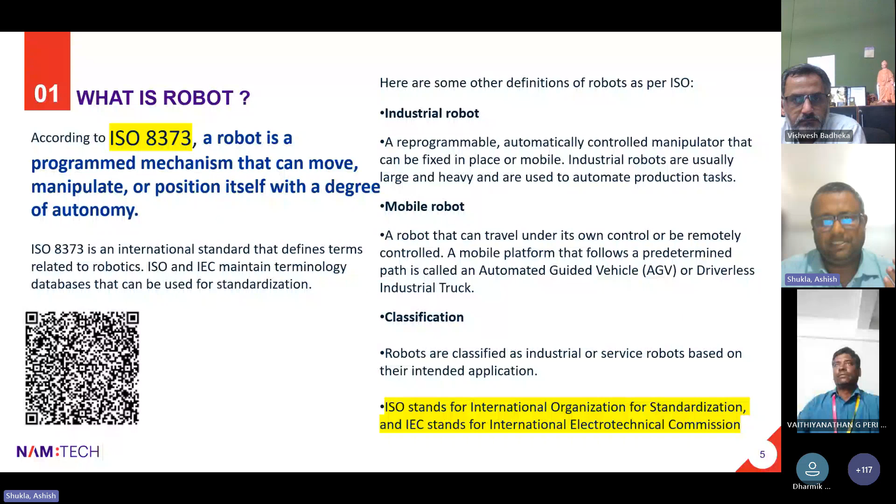Now Industry 4.0—if I'm writing to you, dear recipients, in a mail, because in Industry 4.0 communication is also a parameter. So if I'm writing 'dear recipients', or 'dear sir', or 'dear sir, madam'—how many of you are okay with this kind of writing, or how many of you would like to hear such writing?

Probably the numbers may be less, or this may not be very attractive for each one of you. So what is that? This era is called mass creation for email or production basically. You can take this as anything—if anything starts for production, it starts with communication initiation. Then, how many of you like this?

Probably very less. What you like is basically mass personalization. Let's say if someone writes to me 'dear Ashish', I would be more attracted to that mail rather than 'dear recipient', 'dear sir', or 'dear sir and madam'. So basically, how to deal with such a situation?

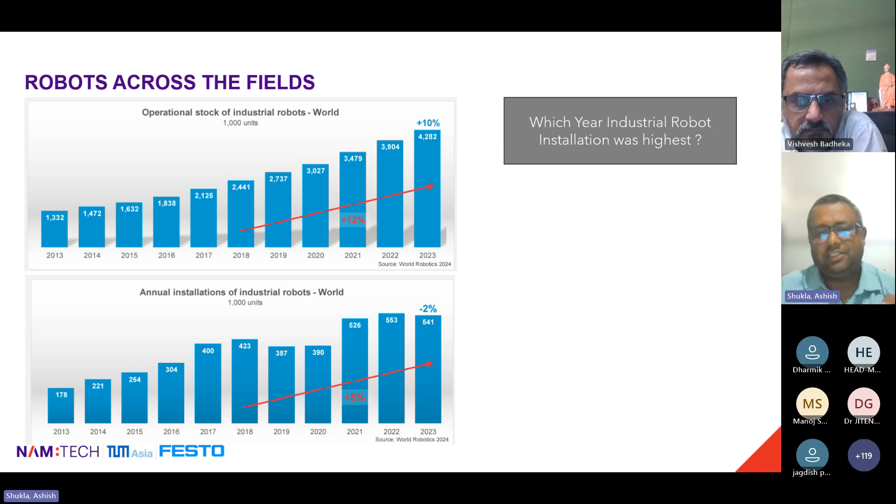In 2022, it was the highest year, and 2023 was the second highest year in terms of the number of robots installed across the globe—or I can say industrial robot installation was second highest in 2023, after the peak in 2022.

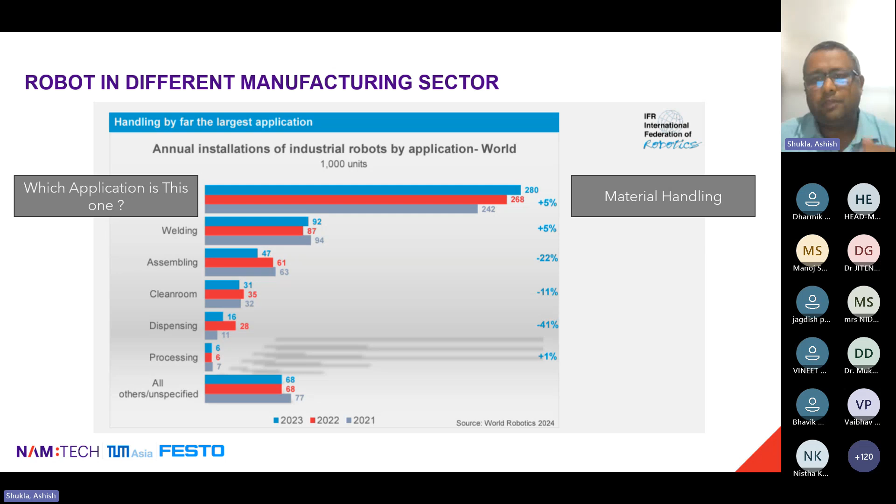So can anyone please try to guess which application is this one, which I have hidden? Anyone? Painting? Painting, of course, good one. I mean, that comes under processing basically, but this is the material handling process. So almost 60 to 80% of the market, varying from the globe. Geographically, the differentiation of material handling keeps changing, but it goes up to 80% and minimum up to 60%.

So what you all learned so far basically, let's have a discussion about what these 8 or 9 slides helped you understand, basically the scope of application. So simple application is basically material handling. So that first thing you learn is the scope of application, where you can identify the robots' application, deployment, functioning, or engaging for the Industry 4.0 application.

Now the second thing you learned is about the scope of market. India at the seventh number. So every day the installation of robots across the globe keeps on changing, or it's increasing simultaneously. So the scope of robotic installation in India is also getting increased.

Now coming to the very important point, how you are going to do this and what you are going to do with this. Basically, the scope of market is going to help you improve the robotic application. It is going to improve the robotic operation. It is going to improve the maintenance. It is going to improve the entire ecosystem of manufacturing basically.

What's your action now? Can someone please try to explain what would be your action after looking at these two learnings so far? Anyone? What would be your action?

Would anyone like to share, please? Okay, so in terms of action: learn how to design a robot. It should be your first and foremost action. Second should be learn how to utilize a robot, and third is learn how to visualize a robot. These three things are very different in nature, but simultaneously required for each individual robotic application. So can someone suggest how to design a robot?

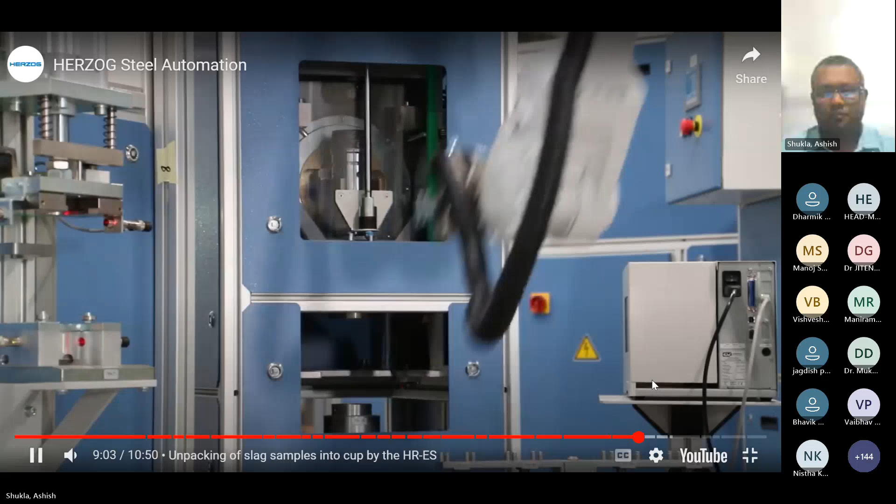Am I audible? So would somebody want to speak about this, whatever they have seen? Hope I'm audible. Yes sir. So does anyone wish to speak about this, whatever we have gone through in the video? Would anyone like to?

Okay, let me speak about that video and then we'll come to what was the problem for me initially. When this particular system was there, this entire system was divided into many parts. First of all, this is basically an automatic operation. So my question to everyone is whether every automation is robotic, or robotic is a part of automation. I understood that robotic is a part of automation, so every automation may not come under the category of robotic.

The one robot you are seeing near my scroller is there to receive materials. Can you believe how much distance the material is transported to get into this cell? It is almost 1 kilometer, or maybe sometimes 2 kilometers. It is a vacuum transport.

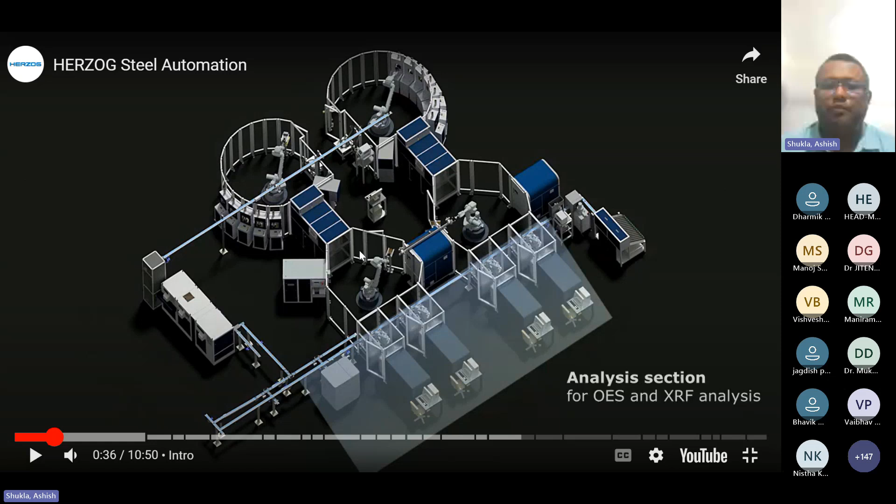Once the material is received, it gets into the material transfer unit. This robot is helpful for identifying the correct recipe, because to get the details or composition of the steel, you need to do certain processes. Once those processes are done, its chemical composition is identified, and finally it is transported to this particular zone where you can see the micro sample area.

There the samples are basically stored. Still, I think there may be a possibility that this is not understood by everyone here.

The entire problem is defined into three parts. One is how to find the composition - of course you need to take a sample out of the furnace. Secondly, you have to take the temperature out of the furnace. Then you have to ship that material to the system where it can be identified.

The second one is they are doing the sampling. In that sampling, how things are done - again the human being is exposed over there. They have temperature jackets with them, but the problem is these temperature jackets are not going to help protect them. So what we have done is identify a robot for sampling and temperature measurement. You can see the third video showing how it is done.

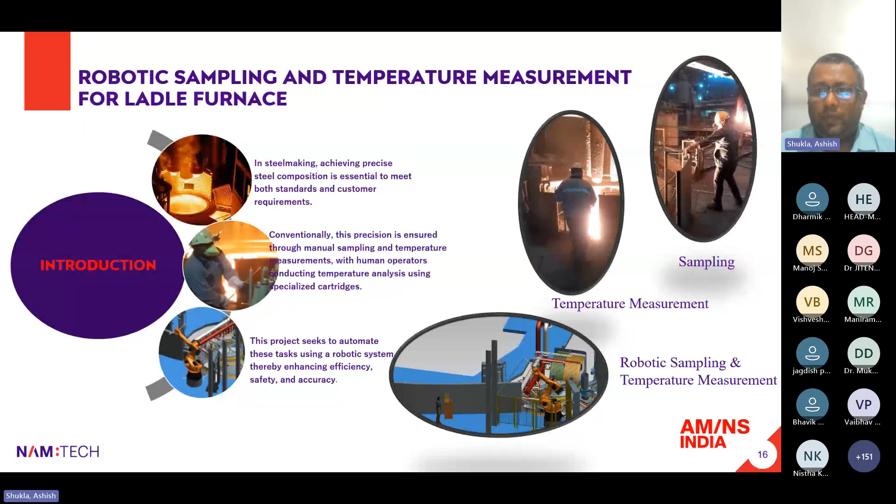Once this is done, our objective is to eliminate human intervention, reduce the cycle time, increase worker safety, consistency, and accuracy as well. You can look into this system.

Now the part is how you can do the robotic design. This was the challenge for us - near the furnace, how we are going to implement our robotic solution, what phases we went through, and what were the critical challenges we faced while doing this entire activity. I'll quickly go through the details of this example.

This was developed using visualization software, and I'll go through a detailed version of this.

So this is the cycle which we opted for the entire problem solution.

Is it visible, or is it still loading? No sir, still loading sir. Okay, just allow it. Yeah, I think it is visible.

Yes sir. So the development journey for the robotic sampling and temperature measurement was basically the CAD modeling of the entire structure. I'll show you how tough the structure was.

Lance and cartridge - for a good designer or a beginner, the toughness or level may vary. After the lance and cartridge design, you go for robot payload analysis, selection of robot placement, then robot kinematic analysis, then proof of concept deployment, showing how the entire situation was handled.

So this was the entire layout. It was, I can say, almost 5 acres of area where we did this entire work.

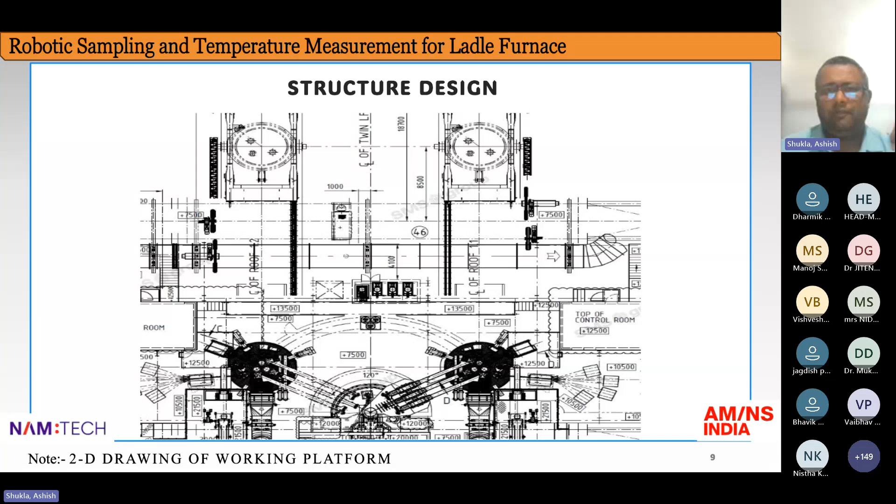So the first phase for us was how to make a 3D model of the entire scenario. This 3D model was built, and after building it, we had to place the furnace. After placing the furnace, the second task was to identify the area or scope where this entire deployment can be done - as I said, design the robot, deploy the robot, or visualize the robot.

Here the robot was standard, applications or solutions were designed, and the deployment - here we are doing the visualization part. These were the two areas where we found the robots can be deployed. We identified the area to utilize it as closely and as much as possible.

So the lance and cartridge design came into the picture. You can see over here that the lance and cartridge - the symmetricity of the lance - you can observe it's a highly unsymmetric job, and you have to incorporate that into the robotics. The robot takes care of every unsymmetricity of the job in its payload capacity. If the job is symmetric, the payload capacity will reduce, or it may be at a very conformal level.

So just a question I would like to throw out - let's say the weight is 21 kg. Can you assume what the payload capacity would be? You may try to figure this out while I continue my talk.

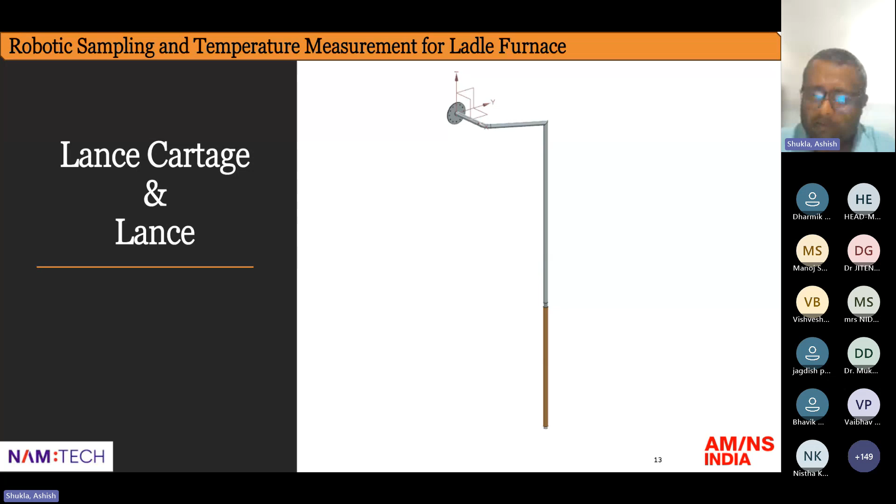So this is the cartridge - who is the supplier, what is the material basically - and now this is the process which you saw in the video.

Now we have to automate this. This was the person, how they are lancing this, till what depth it is going. So all those things are given in detail to us. But now, how to make it a robotic operation?

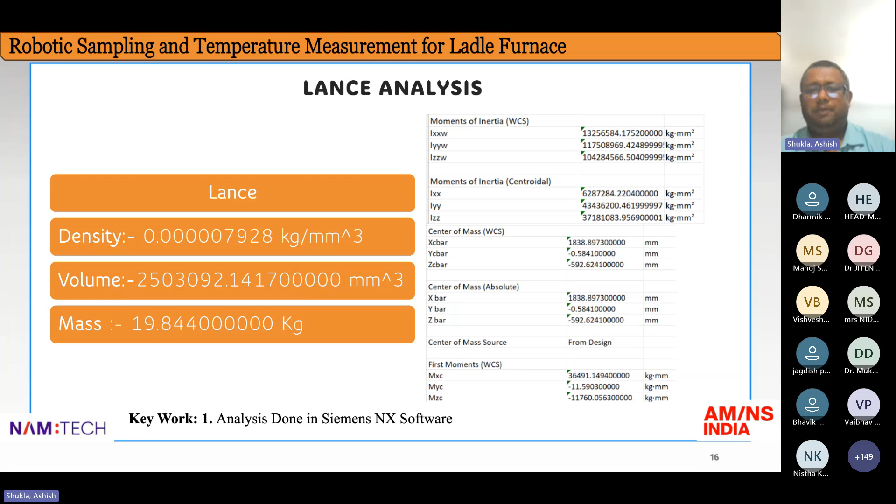So on this side, I can say the 2D version of the image is provided here. Now this is the lance analysis, because you need to do the moment of inertia, you need to find the center of mass, center of gravity, everything you have to find out when you are going for payload capacity. So this is the payload analysis, just for reference.

Similarly, we did for the KUKA, shown over here. We did for the FANUC, we did for the ABB, we did for the Universal Robots. So the entire verification, whatever payload capacity we are going to choose, should be verified up to multiple levels. Of course, the make which you are going to choose may vary and change a little bit, but yes, you will be able to find out the range.

Now, for the gantry, they have to identify how and what they can do with the gantry. They can place the robot on this. And this is the entire simulation, done using the Tecnomatix software.

Similarly now I'll come to the part you saw in the video. That video is also the entire process, maybe modeling, maybe designing, or through certain processes, or through video making as well, or the representation. But once you are going to make a similar visualization, it should function in the operated way.

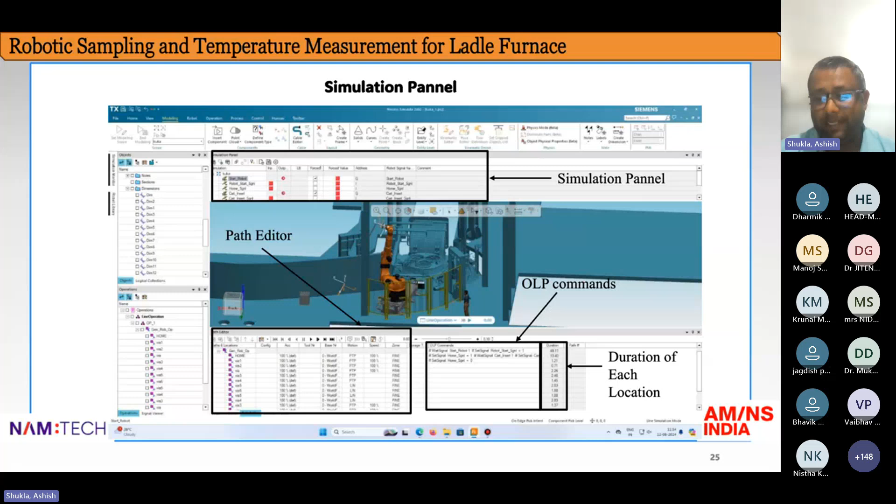So those things are done over here. Basically you can see how this process is taken care of over here. On the left side, you can see the robot is placed, robotic gantry is placed, safety gate is placed, temperature lamp is placed, push button is placed.

So these are not just a 3D visual representation where I made a block or a cylinder, placed the light, and probably it is glowing, and I try to make the animation that it will glow and it should not glow. No, that's not the case.

Basically, on the right side, you can see the simulation panel. Each and every individual activity you have to simulate. The other difficulty is you have to simulate and integrate it with your hardware, the robot, as well as your PLC, programmable logic controller, or the controller of the robot, whatever you wish, because sometimes people directly operate the robot with the PLCs, or sometimes directly through the controller. So this is one of the difficulties you can come across if you are designing a solution.

So this is another part where, typically, just as when you are going to make some electrical or electronic things work, you are going to make a hardware connection or the other way of connection. So the hardware connection, as you are doing it similarly, this has to be programmed. It's like a hardware input as well as output.

So the input of one signal of the robot to the output of the other function is very important. It's like hardwiring in a simulated version. So the difficulty there is more than simulating a scenario, because just making a robot run, you can of course go by clicking or jogging the robot, you can do that work.

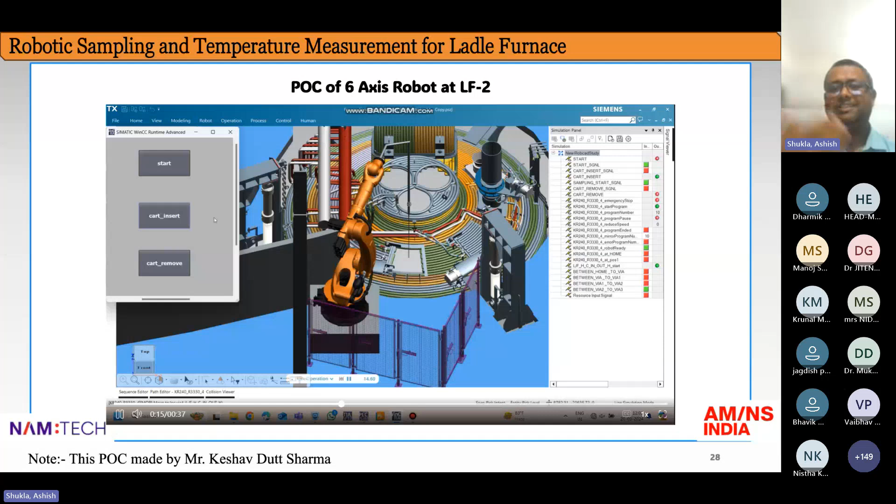So whatever, why these things are used for plant commissioning or plant simulation, because these are very appropriate in their dimensions, so it will not miss. Once your geometry is uploaded from the 3D model and the robot is placed, the robot is not interfering while making the actual installation - your robot will not interfere with any of the objectives. These steps are followed very carefully.

Now these are again whichever we have seen. So initially what is going to happen is the human being intervention will come into the picture. On the left side you can see human beings are there. So now the person initially, which you have seen in the video, who is taking the temperature and putting the lance for the sampling...

That person was exposed to 1600 degrees Celsius, though the environmental temperature may be 200 or 250 degrees Celsius, but he has to see into that well. Now, how to make his work as humble as possible? Once this entire process is done, the human being is taken 4 or 5 meters behind. So now the human being can place the cartridge in, it will acknowledge and do its job. So basically the intervention of human being can be checked over here in the entire process.

So here the key safety advancement they are taking care of. So if any automatic pressing of the safety buttons happens, then it will automatically stop and it has to resume from the same point.

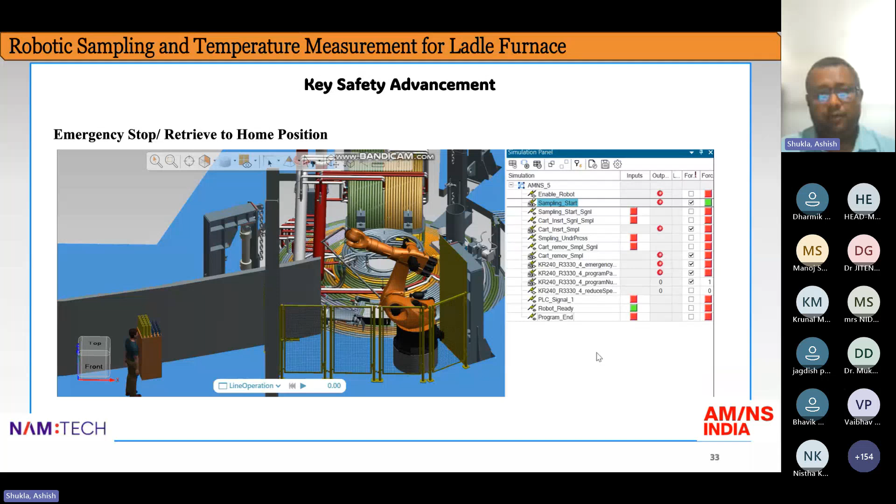Execution timelines. So now I'll come to the very important point of this, like what are the other challenges basically, and I will try to make you visualize what are the 6 different frames that were observed in this.

Yes, so total 4 or 5 - yeah, total 5 types of proofs of concept were made. So this is basically, I can say, the beauty of visualization of your robotic application solution or the robotic solution.

So in this, you can see how 2 furnaces were analyzed in detail and where to place this particular robotic application was identified, keeping in mind that all other scenarios of the processes were taken into the picture. So those are the things.

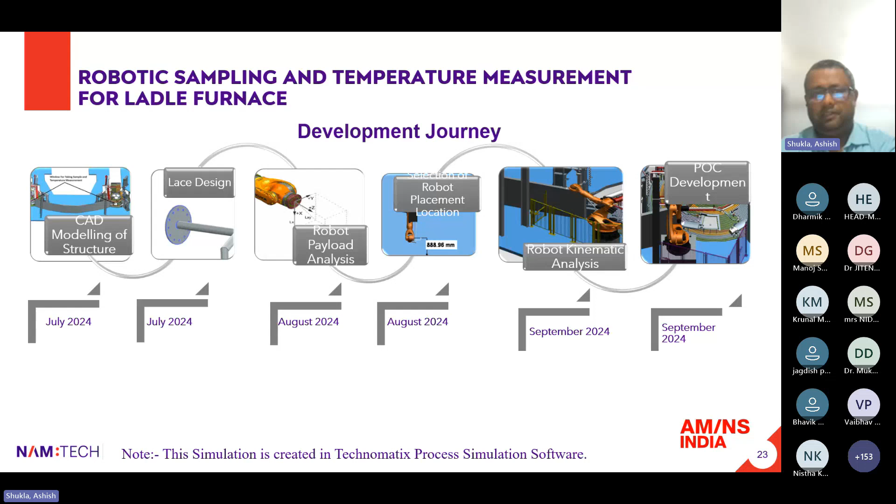Now in this, again the similar things you will observe here. Yeah, so these things we have discussed in detail, the entire development journey. These were the steps taken care of while developing the process.

And now the key safety advancement was developed over here - the robot stops automatically when the safety gate is open. We'll see that - yes, so the safety gate is open and the robot got stopped automatically. Now this robot resumed from the same point.

What next we were supposed to do, we can see the lamp is glowing, it was acknowledged, button was pushed, safety gate was again open but stopped. The next point was it should resume and come back to the home position. That also we have to visualize because this was the demand from the customer side - that yes, you have to show us this visualization as well.

So similarly, retrieve to the home position - this was developed to retrieve to the home position.

So the emergency was pressed, it came to the home position, and now again it will start from the home position. So this entire visualization was related to that.

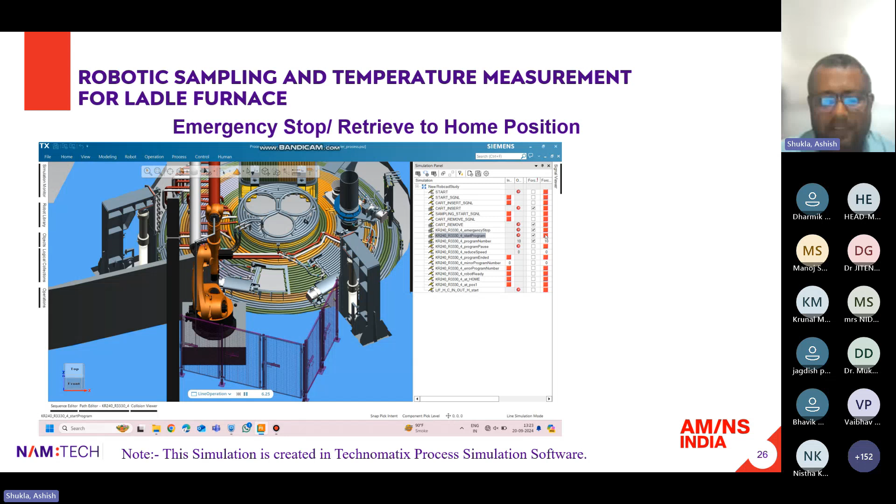Now going for the next one. So along with this, what were the other critical phases we observed, and what were the important instructions? I'll come back to this slide.

In relation to this, so far we have covered how to find the composition of the steel, how to take sampling and temperature, and how to handle them. This we have observed. Now we are going to observe how to handle the material.

So basically for that activity, I will take you to another presentation. In that we'll see how this works. In this slide, you would be seeing a similar setup which is basically in Germany. But now this setup is in India, and we have to make it the indigenized version, how this can be done. So I'll come to this slide.

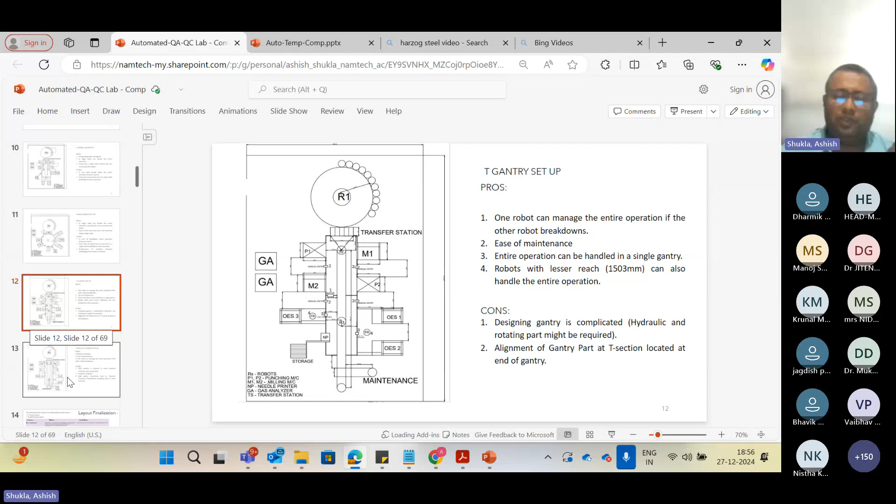So this setup we have designed thoroughly, we have thought the process, made different versions, made the trial or visualization of how the robot would function, the advantages and disadvantages of this application, and the layout finalization activity we did.

So the virtual simulation, I'll show you the different types of virtual simulation. Total 5 or 6 virtual simulations we have done. I'll show you one simulation over here.

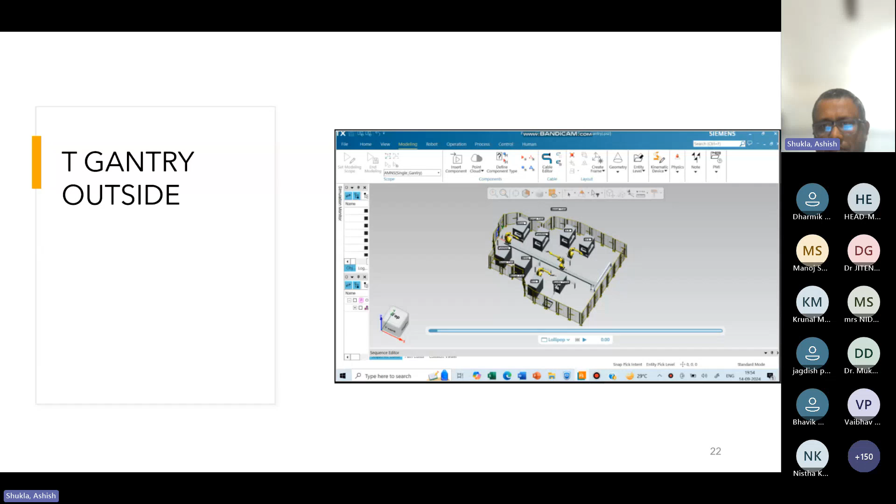Is it visible? Yes, sir. I think there's some difficulty playing this in full screen mode. Just try to visualize.

So one robot is over there. Total 3 robots we have made working in this. The first robot, after the home position, goes to take the sample. A small red color sample was there. Now it will come and place it for the milling operation. After placing it for the milling operation, it will go to the home position.

Now the second robot will activate. This sample was taken and it will go for the punching operation, because these are the recipes where the material has to be handled basically. So this material was having only the milling operation, punching was not desired for this.

Now the second robot will go and take the sample and go for the OES. What is that OES, now comes into question. It's optical emission spectroscopy, which is going to identify the composition of your steel material, or any material in the metallic domain. So it has given the sample to the OES2, and once this sample was taken...

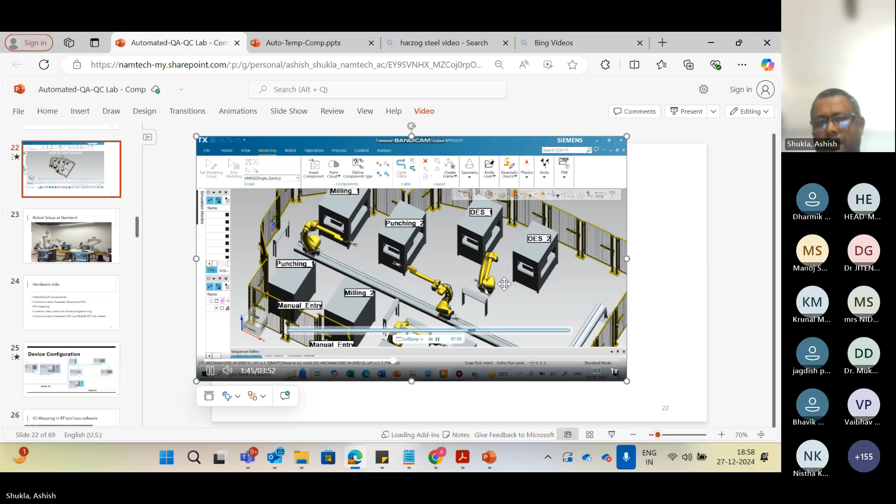It will place over there because another robot is handling the 2 OES stations. And now this robot will take the sample and place it for needle printing, sample marking, and post the needle printing, it will go to the bin where it has to be placed.

So this is our version of making the entire process. Initially the video which we have seen was the German version of making this entire process. So we have to think thoroughly, we have to value our own thinking on how the application can be designed. We need not be very similar to anyone, but you can uniquely identify the pros and cons and design your own solutions as well.

Now, coming to the proof of concept. I'll show you the hardware, how we did this entire hardware process or proof of concept programming. I'll show you how this entire process is done.

So out of the scene, we are having two robots to demonstrate this application. But the other features like the milling machine and punching machine are a dummy process. For that, we are accepting that this is basically a time elapse. So at some place, we are identifying the sample just for the time elapse, but there also we have sample identification for whether the sample is placed or not.

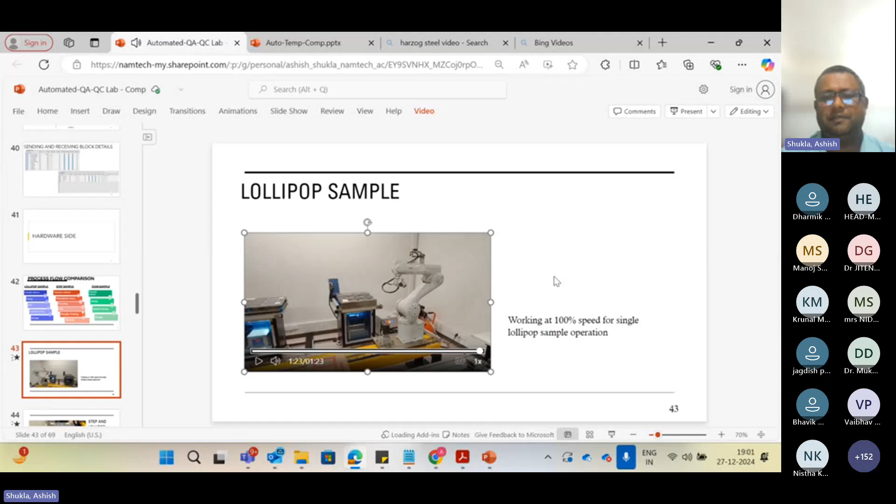So for similar kinds of things, we made the proof of concept, and once the entire time elapse is complete, we would be able to do it. So post writing the sample number, it is placed over there. I think we can see the sample number being written.

So this process was basically to write a sample number. There were the possibilities to write the sample number and take the sample back. So similarly, we emulated five or six different scenarios for taking our entire process.

We did this entire process for at least 11 samples initially, then we went for 36 samples, then 126 samples. Our target was to do the entire 1100 sampling, but we could not go up to that level because of certain limitations. But our target was to make the 1100 sample processing done through this, as well as through simulation, because eventually we had a similar setup where only a few setups are dummy, like milling and punching on OES.

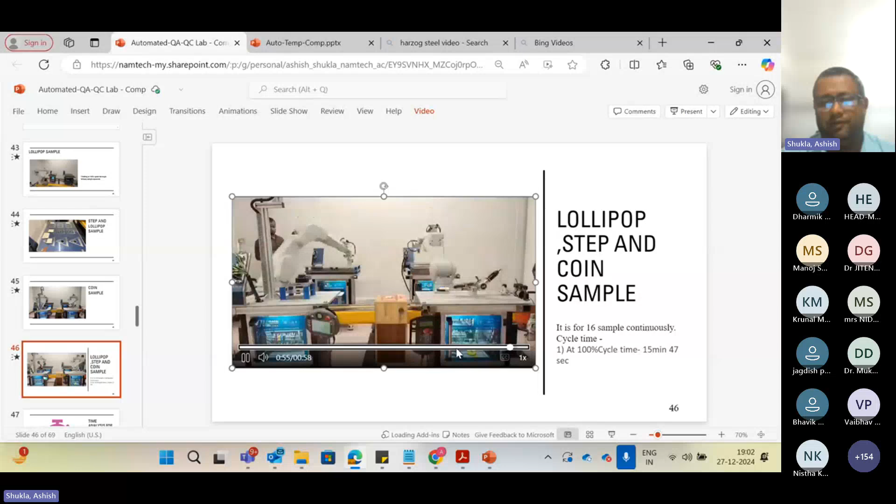So we were able to demonstrate that wherever such setups are not available, we have the resource of only visualization of this entire proof of concept. So there the cost of the other factors will reduce, the cost of the setup will reduce, and we can test and trial a number of processes.

Before going for the selection of the robot, this was the entire criteria and characteristics. We had to identify at each joint level what is the importance of the rotation, how many rotations we need in the entire process.

So we calculated, for example, in a 24-hour time duration we need to handle 1200 samples, and out of those 1200 samples, how we would be able to make our robotic operation thorough, and what is the saving time for our robot.

So we analyzed three different types of robotic operation. Let's see whether it is loading properly, I'll show it to you. So let's say the total number of rotations in joint 1 degree is 10 lakh 80,000 rotations desired in joint one. We did this for robot one, we considered the Fanuc ArcMate robot.

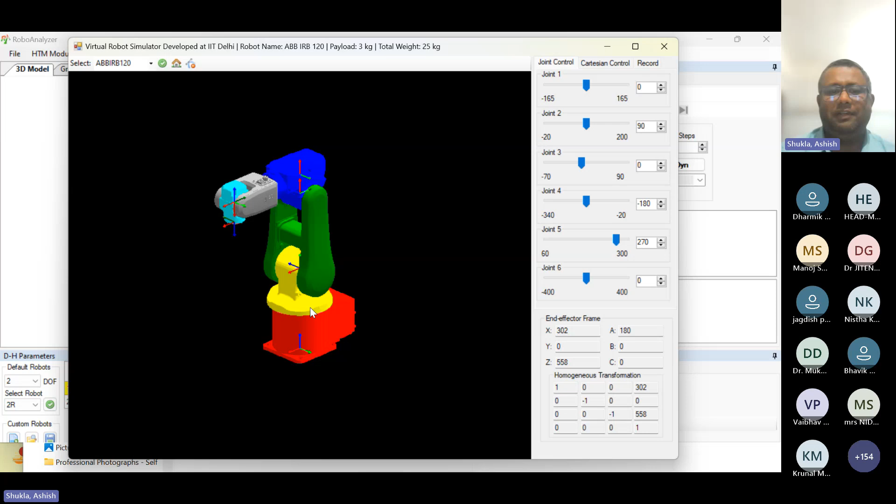In that case, let's say this is your robot. So first of all, you identify how many joints you are having, which one is joint one, so people can exercise this. Now joint one is moving, and it can go up to this number of degrees, right? Once you do this activity, you would be able to identify your exercise entirely to design your work envelope. This is the second activity.

But this type of movement may not be permissible in your action. You have to change your joint angles also, and all those joint angles may not be in a similar fashion. So you have to make a perfect envelope for your robot's work, how your robot will work or how your robot will not work.

So let's say if these joints are given to you, would you be able to make a work envelope? Can your robot work like this? Probably no. Anyone can say that your robot is not going to work in this way. Yeah, Ganeshji, you are having some question.

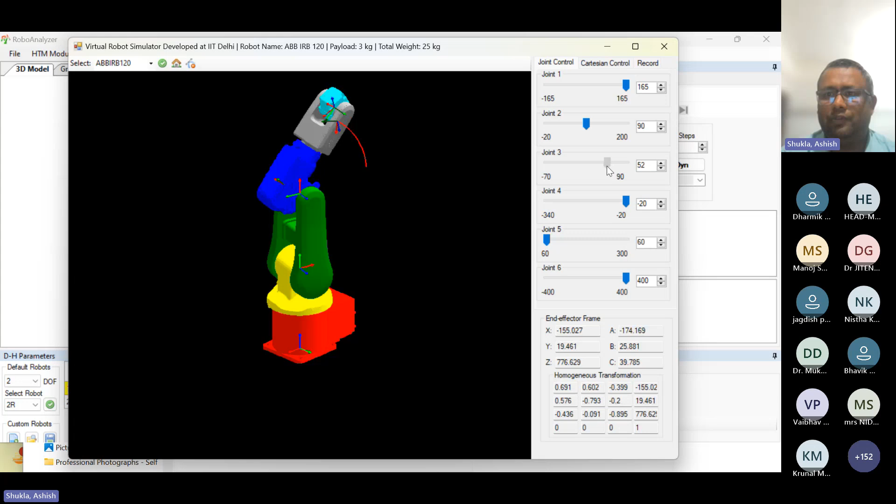So here you can reset the curves, and then you can start first of all with joint number 3. So this is your robot's extreme height. And here you can now, what is again important? Now joint number 2. So this is the joint number 2 entire envelope.

And now coming to the point when it is joint number 1, so if your robot is able to make the joint up to this level, this would be able to identify your work envelope. Whatever you are designing to do the work, it should be within this envelope.

And from the end effector frame, you would be able to find out its homogeneous transformation as well as the X, Y, and Z values. So this is the one activity you should do while considering your robot or making your robot, that it should span up to the dimensions near and around the peripherals. How you are going to do this, after getting this you will get the virtual robot.

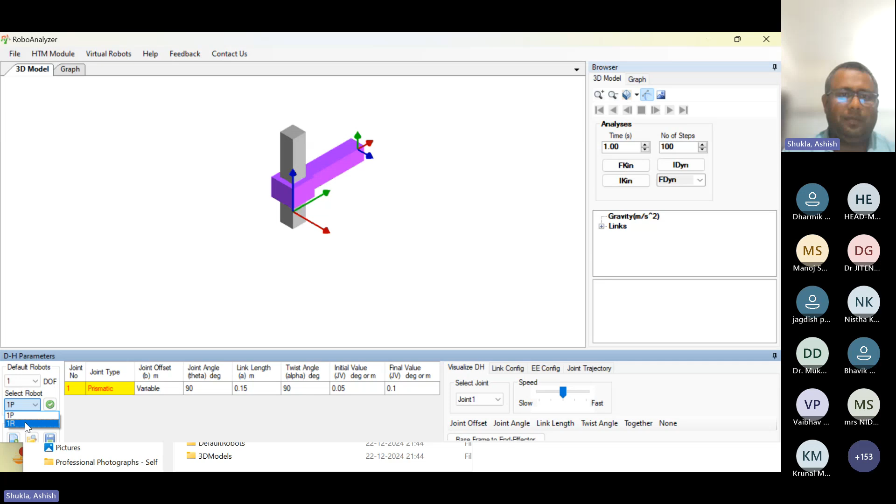Yeah, so after doing this, then you have to go over here. You have to find out, let's say, 1 degree of freedom if you are applying, so this type of thing will come into the picture. This is the prismatic joint. You would be able to find out either prismatic joint or revolute joint. So now this is the revolute joint.

So in this revolute joint, there are things like forward kinematics or inverse kinematics. Let's say if you are delivering it for forward kinematics, it will take the entire steps to showcase you the forward kinematics, this level of variation, up to what level it can go. Simultaneously, if you go for inverse kinematics, you would be able to find out all the values.

You should be able to select the robot, let's say a 2R planar robot if you are considering, then how it will behave. A 2P planar, if you are considering, then how the values will come into the picture.

Those are things you would be able to identify if you are planning for the inverse kinematics of the robots. Here is the simulation panel, and then coming to the graph value - how your graph is identified basically.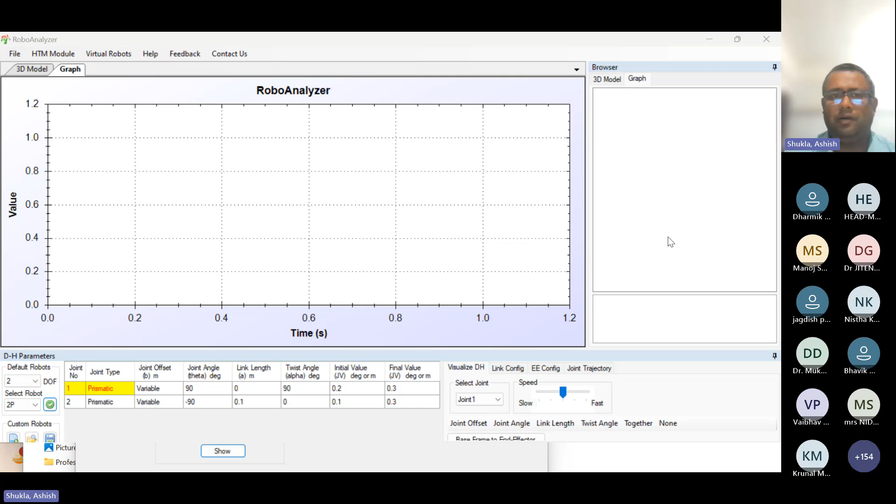In case of the graph, you need to select, let's say in case of the 3D model, first you have to simulate some values using forward kinematics. You can see how it works - let me do this activity again. In case of forward kinematics, these two joints are moving simultaneously.

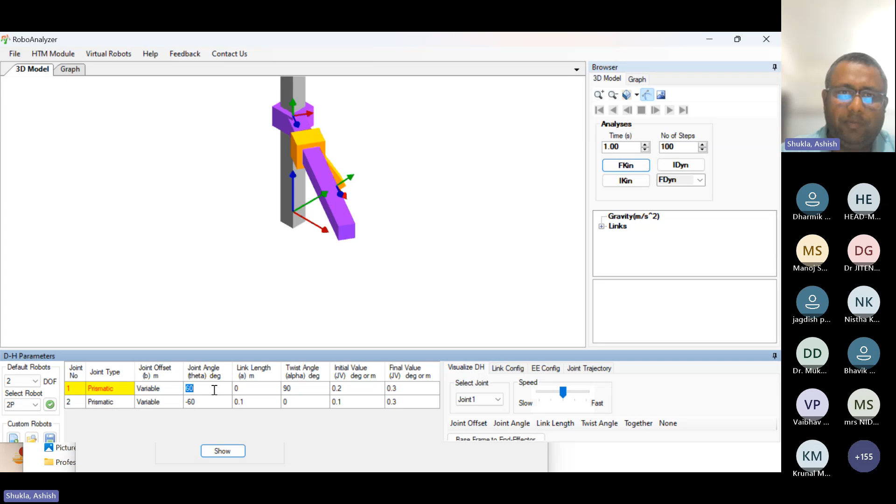This is the line, but let's say if you need to check this, change this joint angle. Let's say if you want to make this particular joint work at 60 degrees, now you would be able to see where your robot's joint is acting. And let's say if you change this from -90 to -60 degrees, you would be able to see how your application is derived.

Let's say I'm generating its forward kinematics curve. You can see, but let's say simultaneously, if you are stopping and trying to make this a positive 60 degrees, you can see if you need any application extended at this particular angle, you should be able to do that.

These are some basic things for your robot design. I am not going into the depth of its mathematics because it is too time-consuming a process, but in terms of visualization, you can see how you can do this differently. So this was my primary target.

Before going into any other detail, let's say if I'm going to target a 6 degree of freedom and 6R robot, this type of robot will come in front of me. And if I need to simulate it for forward kinematics, you just try to observe how my motion is planned - how much area I would be able to cover, what type of trajectories I would be able to make. All those things you can plan.

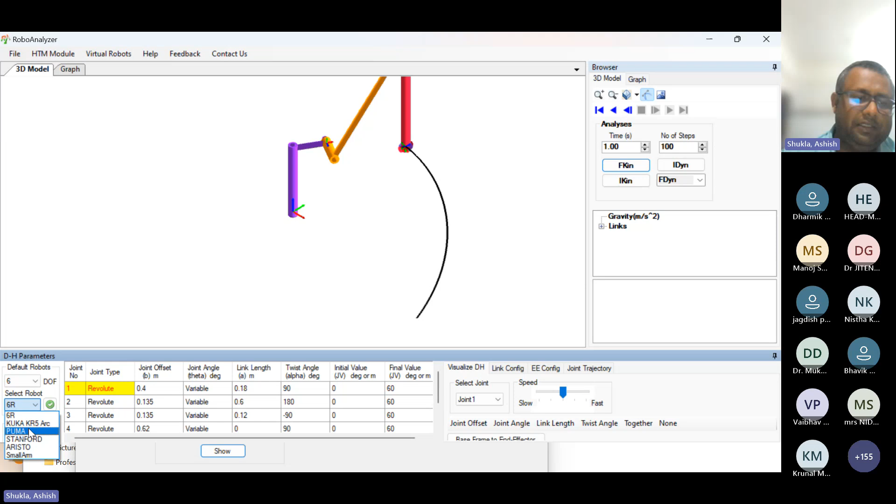If you are having six joints, like the Stanford robot - at that time it was a very standard robot named the Stanford robot - this is very good for exercises to learn the fundamentals of robotics. So here's its forward kinematics. Now if you play it, you can see how it is moving and how all its axes are trying to vary.

Here also you can change things - let's say if you want to design your own robot, if you want to change this joint type, you can change your joint type. So all those things you can plan and experiment with before investing in any heavy value infrastructure.

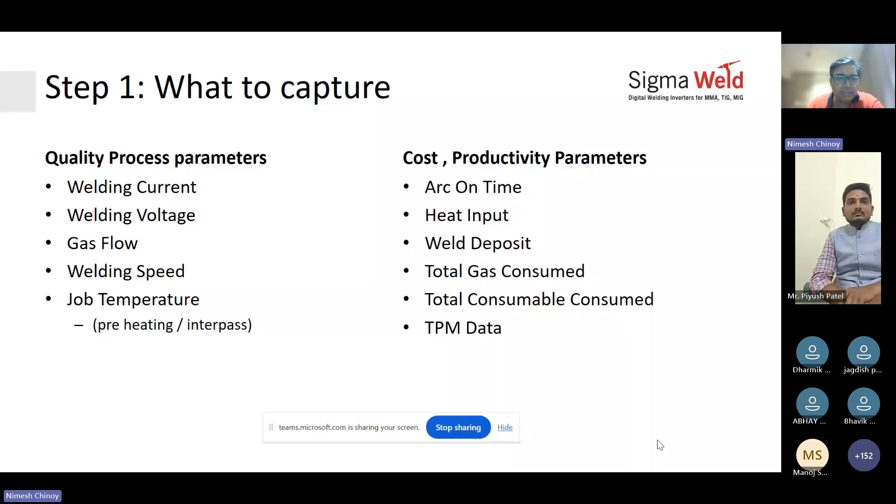Now we discussed the different types of sensors: current sensors, shunts, gas flow switches, mass flow controllers, optical pyrometers, K-type thermocouples, and encoders. So this we had already discussed.

This is a CT, it's a current transducer which measures current, and it gives you the output in terms of 0 to 10 volts as a feedback.

This is a shunt, it usually gives you a feedback for voltage in 4 to 20 milliamps. Here you can see a digital gas flow switch and a mass flow controller, which will allow you to control the gas flow pressure and also calculate for you the actual amount of gas consumed.

These are different types of temperature sensors. So this is a K-type thermocouple. This is the bare wire of the K-type thermocouple. This is when the junction is made. This is where the sensing happens.

This is an optical pyrometer. It will sense and record the temperature digitally. And many of you might have seen something like this, a handheld gun, but this is distance driven, it's laser based, and it also cannot give you feedback into your machine.

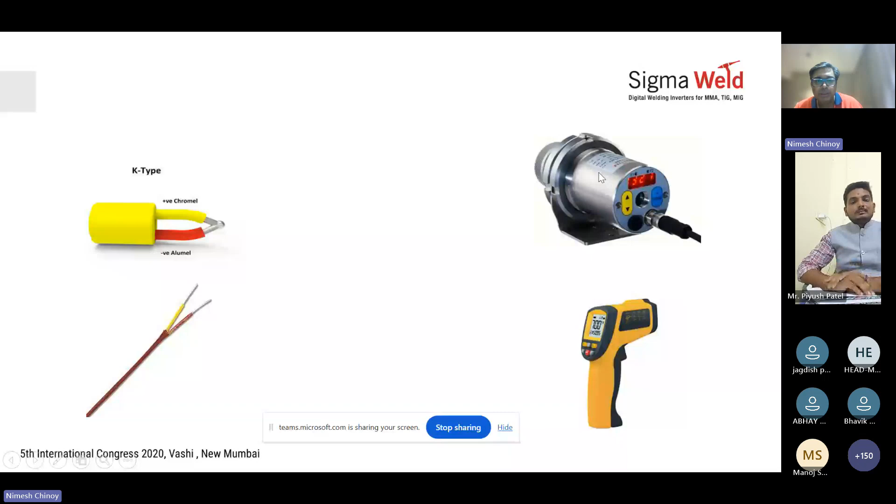So usually you need something like this, an optical pyrometer or a K-type thermocouple, to connect back to collect the sensor or the data. These are encoders which are used for motors to sense their rotational speed, their linear speed, etc.

Now we came into how the welder can log in using either an HMI for username, password, using fingerprint readers to share their presence, RFID cards or NFC cards. These are the different ways of doing it. Most effective are the RFID and NFC cards because they can have more than one data encoded onto it.

The TPM data that needs to be done. So first of all, most of you, quickly, if you can mention on the group, do you know what TPM stands for?

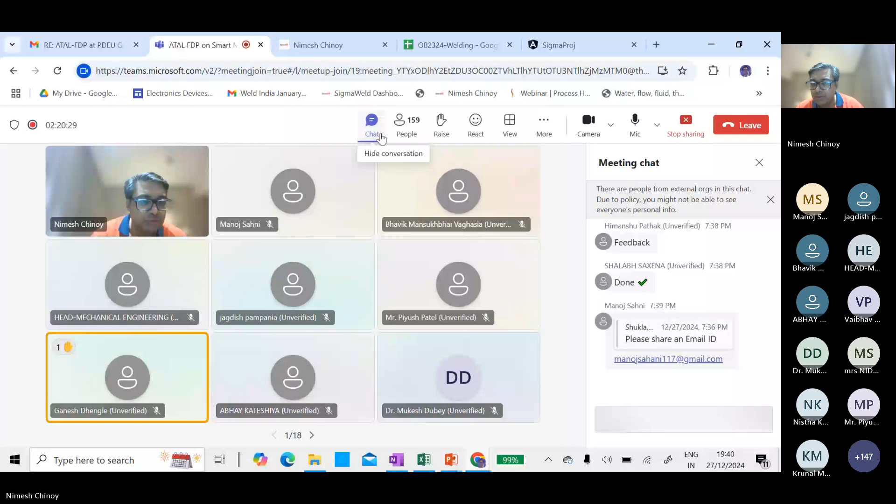Okay, I couldn't see here. Can I see if anybody knows what TPM stands for? TPM.

So total productive maintenance? It's total production management. Okay, so basically, when you are doing any kind of production, the time spent on any activity that you do is measured.

And that time can be either productive or non-productive. When it is a non-productive time, if you know how much time is non-productive, you can capture that time and then you can take an action on it. So what do I mean by that?

Let us see. So if you have data which is productive or non-productive activities, in terms of welding, if you are changing any consumable, that means you removed the spool and you put a new spool, you change the tip of the torch, you wanted to grind the tungsten, you went to bring up the electrodes that are empty.

All these are activities which are necessary. You cannot get a good quality weld without this. So they are necessary, but they are non-productive. They are not helping you produce. So you have to do something to reduce this time, but you cannot avoid it.

Similarly, you have lunch break, tea break, shift change break. These are times you will know when there is no activity at all because there is a clear break. Then there are personal breaks, loo break, for example, somebody wants to go to the washroom. So these are breaks which are avoidable or plannable.

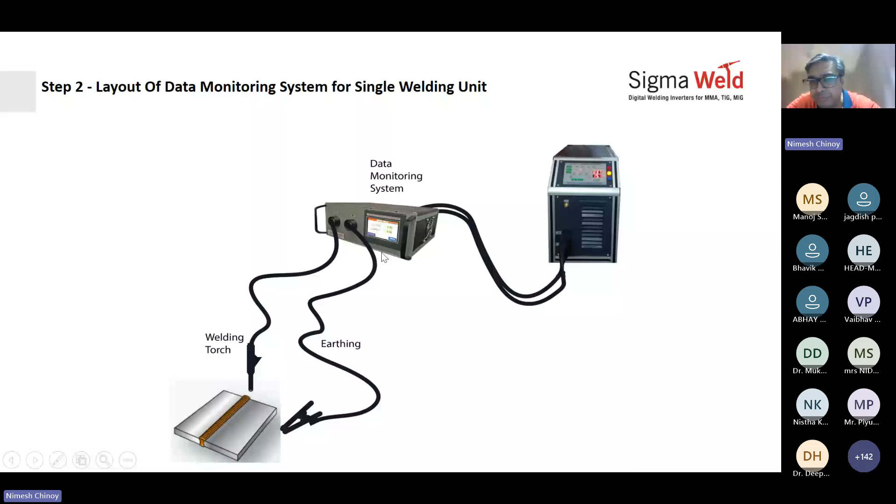If you had many machines on a shop floor, suppose more than 50 machines, you connect each machine to a small sensor box which will just collect the data. They share this data with something called a collection unit, and then multiple collection units send the data to the server, where you can access, analyze, and see it. Here the data is collected physically from the machine to the sensor box.

From the sensor box to the collection unit, multiple machines can connect to one collection unit, either through LAN or Wi-Fi. Similarly, from the collection box to the server, this can be through LAN, Wi-Fi, or GSM. We will see examples of why to choose or what methodology to choose, and when.

Now, your shop floor can be of different types. For example, if you have an automotive shop floor where the workstations are fixed, the operator, the welding machine, and the workstation are fixed. The jobs will keep coming, the operator will weld and put it away onto a bin. So the operator and welding machine are not moving from their place; it's the small components, the job, that is constantly moving.

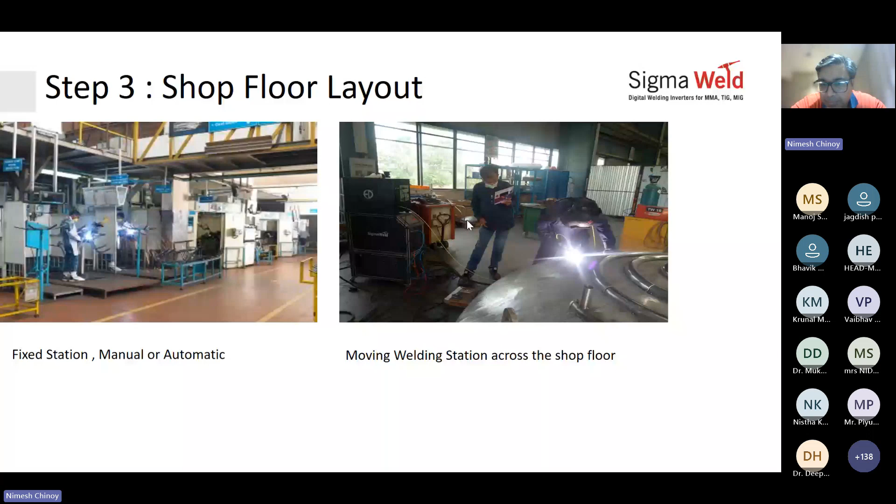...or he can decide to have a wireless connection to a cloud, to a data access point, to remote monitoring points. Or he can take out reports from the HMI itself using a pen drive, which would be an arc-on-time report or a weld analysis report.

Now, for the same setup but with welder information as well - the welder uses an NFC card or RFID card to log in. When he logs in, the power source connects to the server, and from the server it sends out the parameters for which the power source should weld. Then during welding, the sensor box captures the data, uses an isolation card to isolate the signals, and sends them to the microcontroller or PLC.

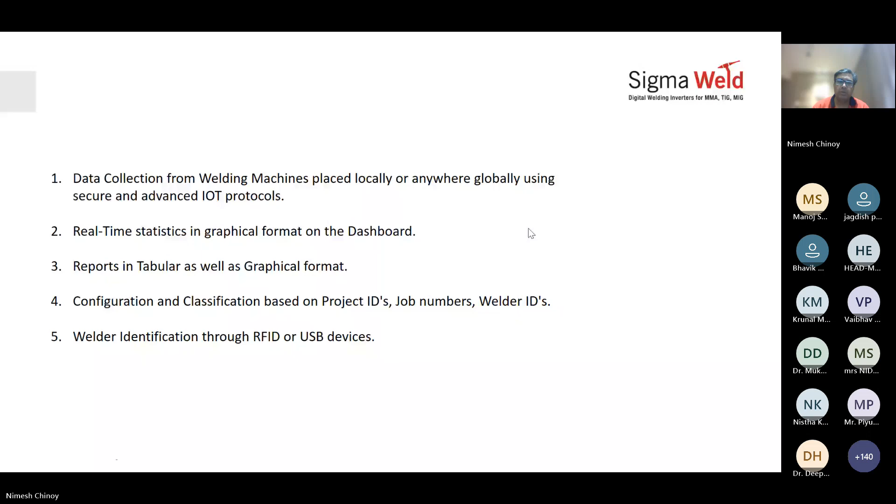Later, this data can be seen on the server software. This is the server software. On the left-hand side, you have all the welding machines, then you have data of the operator and the welding machine being used, including what is the current voltage.

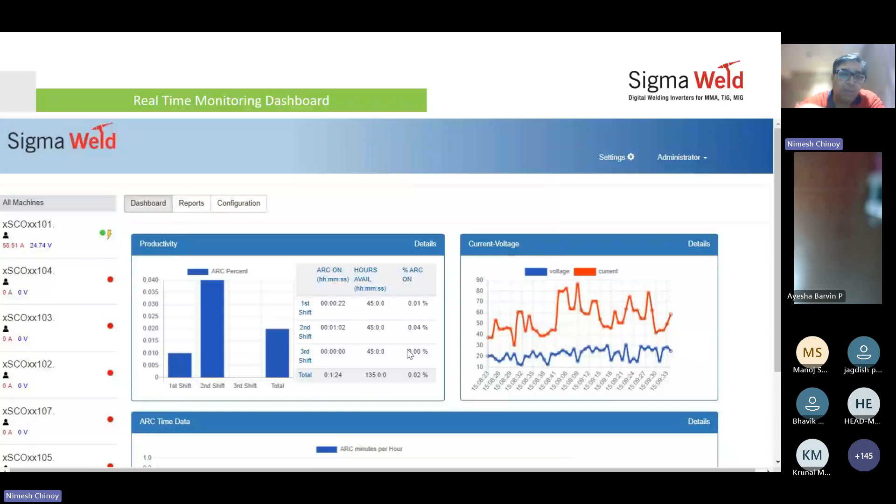On the left-hand side, you could see the machine number. If the user is logged in, you can see the name of the user or welder, and you can see the parameters at which it is being welded. Green with a lightning shows the welding is on. Green alone means the machine is on but welding is not happening, and red means the machine is offline, switched off.

This shows you shift-wise data. You can define one shift, two shift, three shift that you are working on. For each shift, cumulative number of hours are available to you, 30 hours for example, for 2 or 3 machines. It will tell you if you welded for 3 hours 48 minutes out of 30, your arc-on time is 12.67%. This is your efficiency of usage, which you can clearly see in one screen itself.

Then it can show you, for each hour, what was the utility.

Now reports you can have on the basis of time, welder, project, or TPM losses, depending on what you have. If you choose a time-based report, you can say between this and this date, please show me all the machines that were welding, what was the time taken by them, and give me a machine time-based report for 1 week.

Then you can say, I only want this welder. Give me the full report of this welder for the whole month. So it will give you a welder-based report. This can be a machine-based report as well, showing this machine's full month utility.

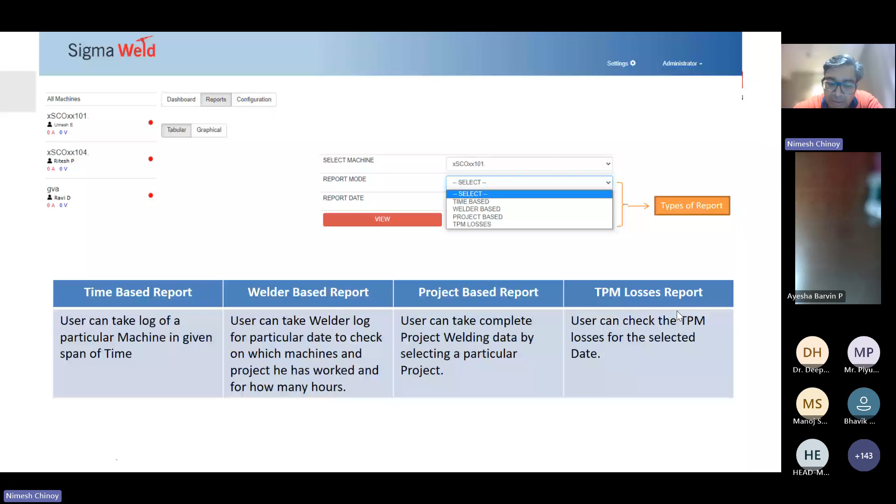This is how you can choose machine 1, time based, this date to this date. Then you select the time and you can say download the view. It will show you a tabular format, and the same thing you can see in graph as well. You can download this as a non-editable PDF.

So you cannot edit it. The data cannot be tampered with. And the number of digits you can control. So you are having 9.8, but here you can see 9.8, 14144. So you can control the number of decimals you want.

Now here I have chosen Abhijeet Naik as the welder and I wanted to see the report of what he did on 3rd November 2020. It shows he was using this particular machine, this was the welder between this date and time, and he welded for these many seconds at these parameters.

One second. Let me come back to you. One second, please excuse me. Just give me one second. Please hold on a second. Please give me one second. I'll just come back.

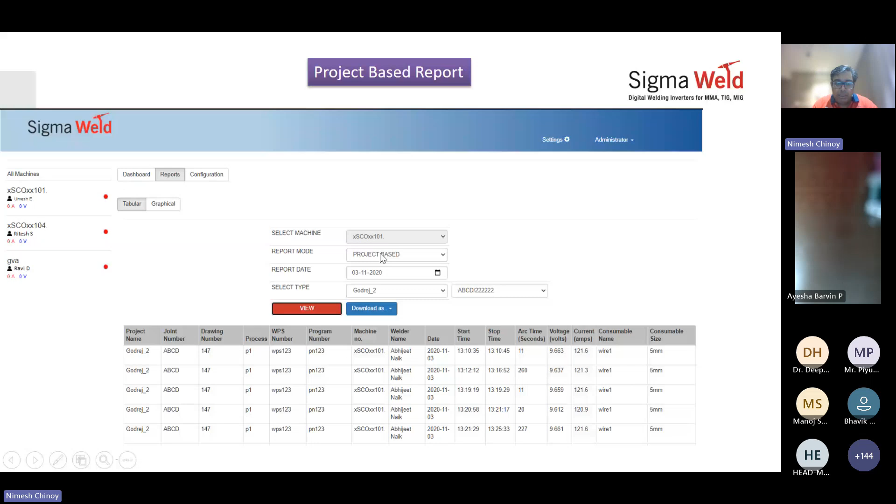You can have a welder-based report which shows you what the welder was doing throughout the timeline. Similarly, we can choose project-based report. I've selected a machine, and here you can see the name of the company, the project it was working for, the particular joint number, drawing number, process, WPS number, program number, different machines used, welders used, and the time between which it was doing the welding for this project and the parameters. This gives you a lot of insight into what was required or what had actually worked for a particular project.

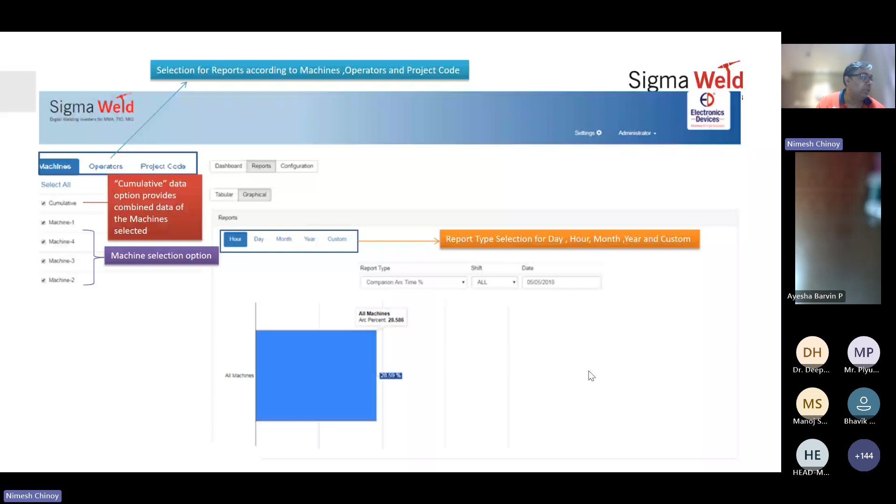Here you can see a cumulative record of all machines, hours, days, month, year, custom type reports you can get. Again, you can take a different kind of tabular report per machine, each machine will show you. You can do a comparison of arc percentage, hour versus minute, deposition rate, depending on your requirement.

Once you have the data, any kind of analysis can be done. So what analysis is important to you? If you mention that, you can have a report similar to that.

You can choose shifts, each shift that you want, shift 1, 2, 3. You can check first shift, what happened, how much was my arcing time in the first shift, how much in the second shift, how much in the third shift. As we discussed yesterday, this is what is important from the production guy's viewpoint. So all this you are seeing is from the production viewpoint.

And you can have monthly reports of comparison, arcing hours per minute per day. Then the shop floor will know the total. I had, say for example, an ability to do maybe 100 hours, but I have only used my shop floor for 27.5 hours of arcing. So I have a potential of another 72 hours that I can do welding. I can take up more work.

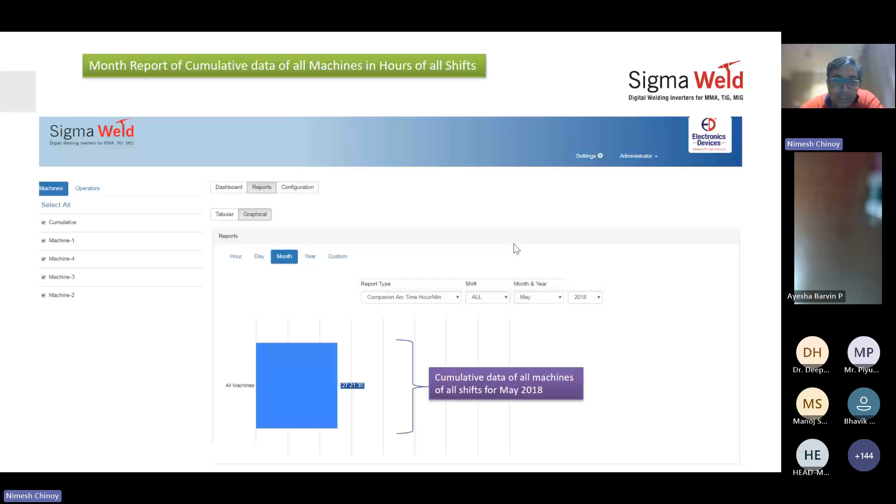You can have similar reports for welder wise, reasons for TPM. So each welder, what is their break time and why? If there are larger breaks for lunch or this, you can probably highlight it to them and bring that time down.

Again, project wise, if you wanted to see if your equipment was used for which projects and each project, what was your arcing time, it will tell you all the data.

Each new machine you add, you can configure it. It needs to be given one particular IP address. You can give a machine name and you assign a particular TCP port to it. And then that is what you will see on the left side, being named as. Here you can have very smart names for your machines, which tell you where or which project they are working on, which pillar they belong to, so that you have better analysis of your work.

This will be shift-wise report, first, second, third shift you can configure. Suppose some companies work 7 to 3, 3 to 11, and 11 to 7 in 3 shifts. If you're working 2 shifts but 24 hours, then you will not have the third shift. You would say I'm working 7 to 6:59, 6:59 to 7. That would be your 2 shifts. If you work only 1 shift, you would say I work 9 to 5:30, then you will have only 1 shift. You can configure this shift.

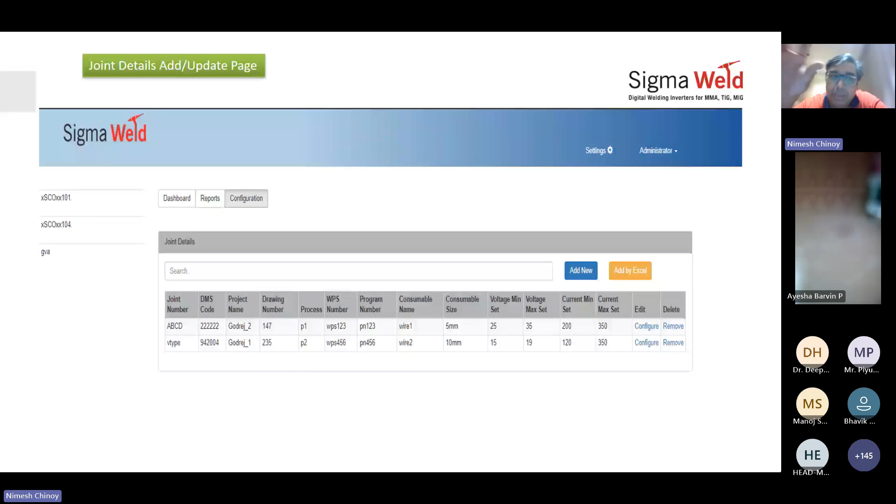So it will say your consumable should be this size, your voltage should be this, minimum maximum voltage, minimum set current, maximum set current. Once you save this, whenever the welder will select this DMS code 222222, this WPS will automatically be loaded onto it because this is what you have configured it today. So if you tell any welder, your DMS code for the day is 222222, when he enters the DMS code, this data will automatically be loaded. So you don't have to tell the welder what parameters, don't go beyond this. It automatically controls the welding output.

Here you can define everything for a new project, a joint number, DMS code. The code will automatically be generated for you, the rest of the things you have to enter. Then you give this printout to the welder, saying this is your code for the day and you have to only work on that code. So welder is assigned, everything is done on that basis.

Now, if you have any questions, I can answer them right now. After this, I'll show you a live website where 50 machines are working. So can we take some questions right now, if there are any? Any questions at this moment? Okay, the participants can unmute themselves and ask the questions.

I think there are no questions. Yes, there are no questions. Okay, no problem. So is my screen visible to you right now?

Yes sir. Okay, this is a live example of a company where about 50 machines are connected to the cloud. So I'm going to log in here, there's a password protected login.

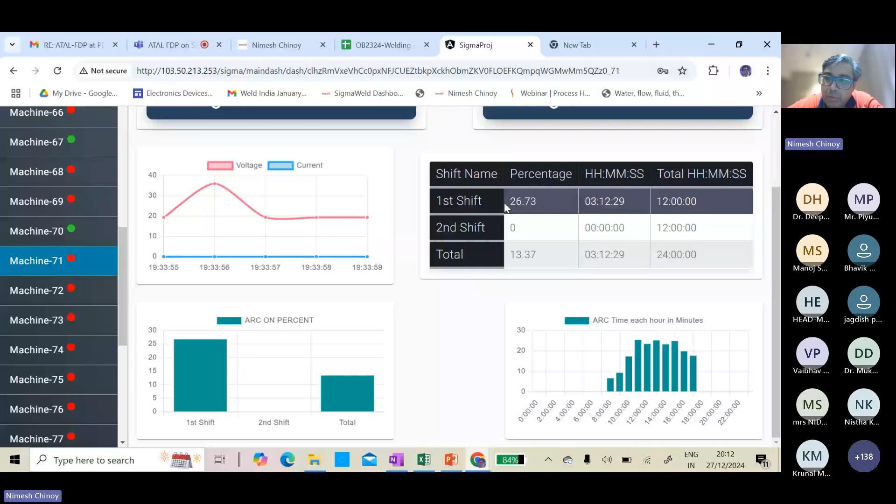Now, when he was using it at this time, what were his parameters at which he was welding? Suppose we are interested to see that. So let's go to reports, and we'll say, what kind of report do you want? I want a machine-based report. Which machine do you want to see?

Let's say we saw machine number 71. So I say I want to see machine number 71. Choose your start time. I say I want to see from yesterday, 12 o'clock at night, till today, 12 o'clock at night. Can you show me the result?

So it's saying this is machine number 71. It arced for 4 hours, 25 minutes, 50 seconds. Now, when did it start? It started at 8:33 in the morning.

It arced for 12 seconds at 204 amperes, so probably he was doing tack welding most of the time. After putting 2 tacks, he put a full weld for 51 seconds at 208 amps, 26 volts. Then again, there was 1 minute welding at 8:37.

Again he welded for the same parameters, for 36 seconds. You can see here, 1 minute 48 seconds. So this machine has been pretty much used for full welding or larger tack weldings, right? And after every 1 minute, the welder has to stop for some reason and restart.

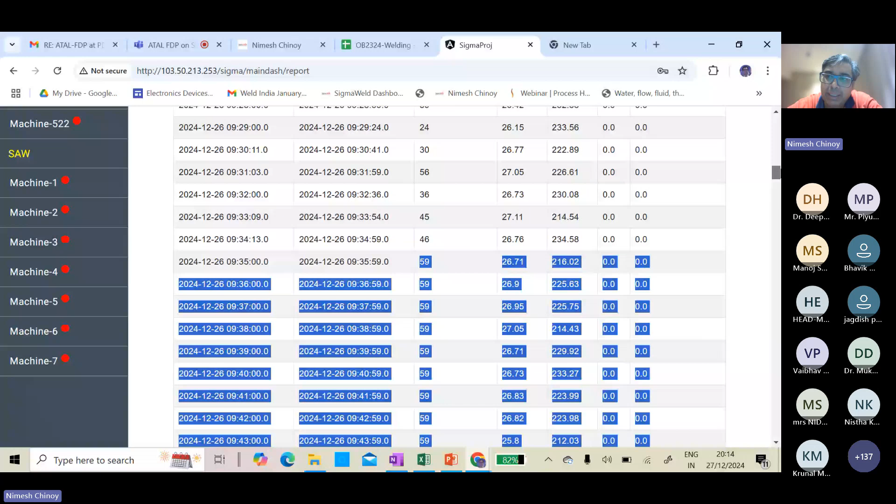Now, they have used only the current and voltage parameters. Had they used a gas sensor, they would have had the gas flow and weld deposition data, and had they used the wire sensor, they would have had that too. They have not used those sensors, so they don't have that kind of data.

Now, here is a classic example for you to see what they welded. And because they are already deciding what they want to weld, they will always remain within the range. They will not be able to go outside the range of welding.

Now, if I wanted to see for the full month, I could say December 1st till today, show me the utility of this particular machine. And it's telling me I have used this machine for 45 hours, 1 minute, 29 seconds. It will give me all the details as I want. I can download this data and it will download it in terms of an XLS sheet.

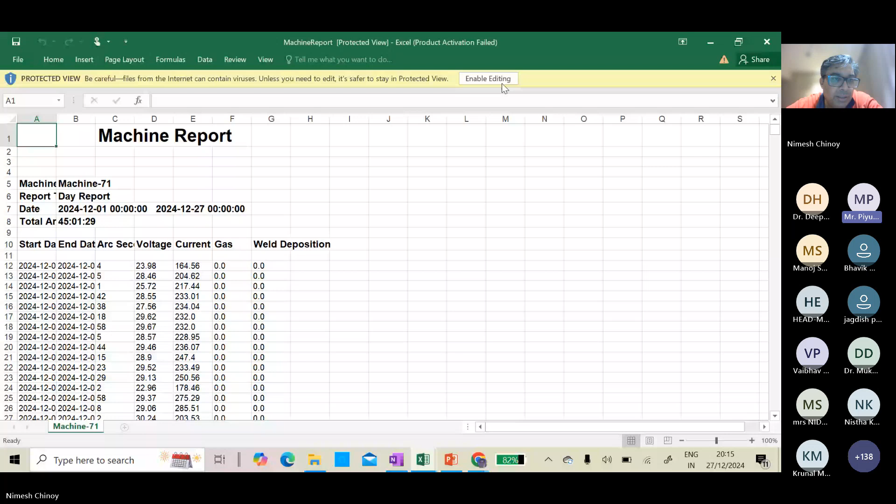Can you see this report? Now this report tells me machine name, machine number. It's a day type report, from 1st December to 27th December. Total arcing time was 45 hours, 1 minute, 29 seconds, and it gives me continuous rating of all the readings that I want.

If I just look at the number of data points we collected, it's close to 4,000 data points, 3,991. That is the amount of times it logged the data. And the sum of all the arc times will give you this 45-hour window.

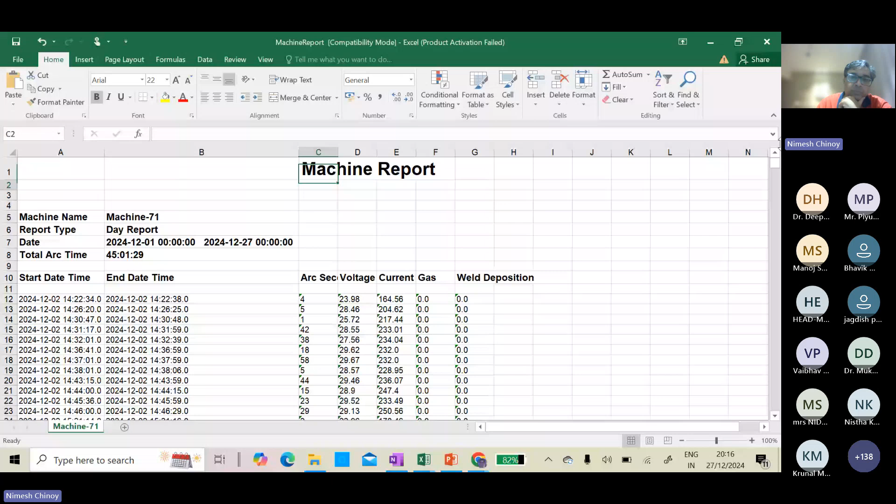Don't save now. Here I can say I want multiple machines. So I want machine 60, 70, 71, 72, 73, 74. I want the result of these 5 machines over this period of time of this month, and I want to view it. And it will show me the data of all the 5 machines.

So probably the other machines are not being used so far. Let us select some other machine, say 53, machine 1, and I select the same time frame, 1st December till today, and I want to view it.

So it's loading the data. Now you can see machine number 1, all the machines that we selected, it has given you the data. Machine 1 was not welded at all, it's not used. Machine 53 is also not used.

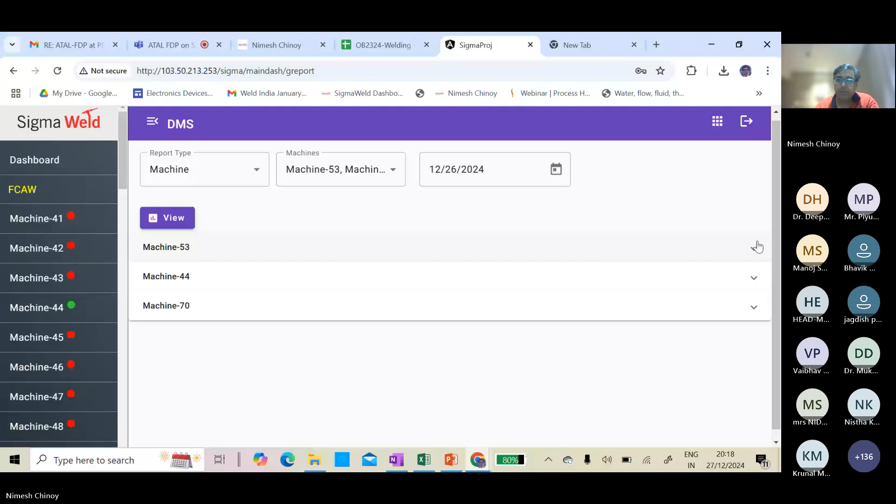So here you can see, okay, machine 53 wasn't used. What about 44? You can see machine 44 was used 18%, 2 hours 16 minutes in the first shift, and maybe only 2 hours 22 minutes... 2 minutes in the second shift. First shift, 2 times it was used, and the percentage is 18.9. Second shift it wasn't used.

So not really used at all. So this kind of graphical data or this data can come. You can have machine-wise details. You can edit a machine, okay, machine name, machine ID, type, subtype. You can change the details that you want. You can add or remove a particular machine.

You can edit your shift details. So here they're using 2 shifts, 8 o'clock to 8 in the evening and 8 in the evening to 8 in the morning. If you had 3 shifts, you can add and say shift 1, 2, 3.

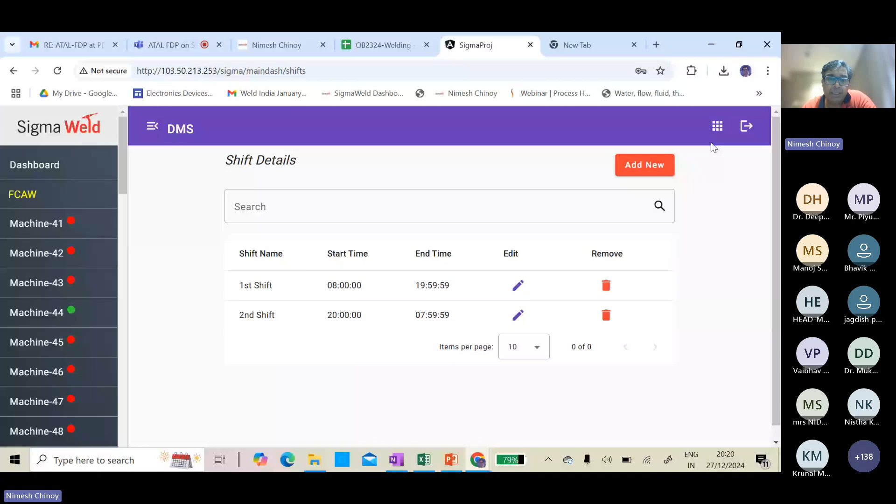Operator details, you can add operators as you want. And if you have more than one operator, you can assign an operator ID, an RFID code, etc. Here you can see name, operator last name, and operator ID is the detail you can add.

And then we saw the reports and graphical reports. So this is what I wanted to actually share with you guys and show you a live example of IoT or DMS. Now I'm sitting in Vapi, the equipment is somewhere in Tamil Nadu, and I can see the parameters at which they have been used or are using it, and I can analyze the data and discuss with them what is good or bad.

Okay, any questions that you would have now?

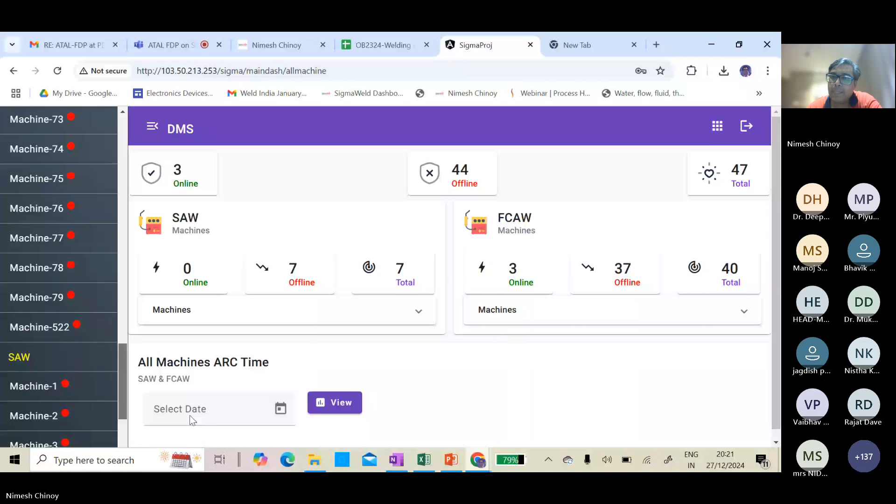Manoj ji, actually this is the end of my content. This was my last slide, and then I wanted to make it more interactive from here. So in case there is something else they would like to discuss, we can.

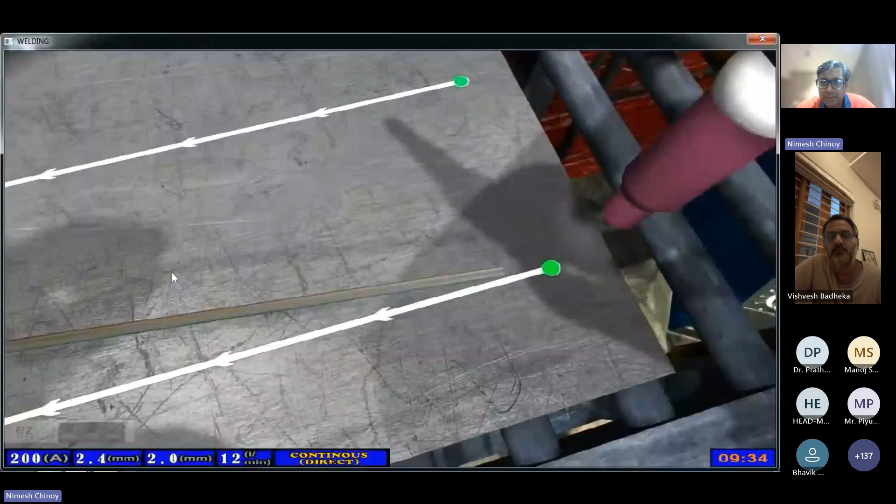Now when he starts welding, he is supposed to weld on the white line. So without using actual metal, he is welding. Now you can see the distance he had to maintain, under 5. If he moves, you can see the distance he is showing on the screen, so he can adjust his distance accordingly. You can see the travel angle is supposed to be 115 degrees, between 91 and 115. He is at 98, so his angle of movement is correct. The orientation angle is also between 78 and 102, so that is also correct.

And the filler angle, which is feeding, you can see is changing. Now every time he is getting too close, there is an indication: please move away. He's too far, so it will tell him to go closer. If he gets too close, there will be an alarm to show him what he is doing wrong. Can you see the red marks? Now this is an easy way to practice welding continuously without wasting any metal or filler, till you get very good at this. Once you get very good at this, you then go to the real metal plates and see it live.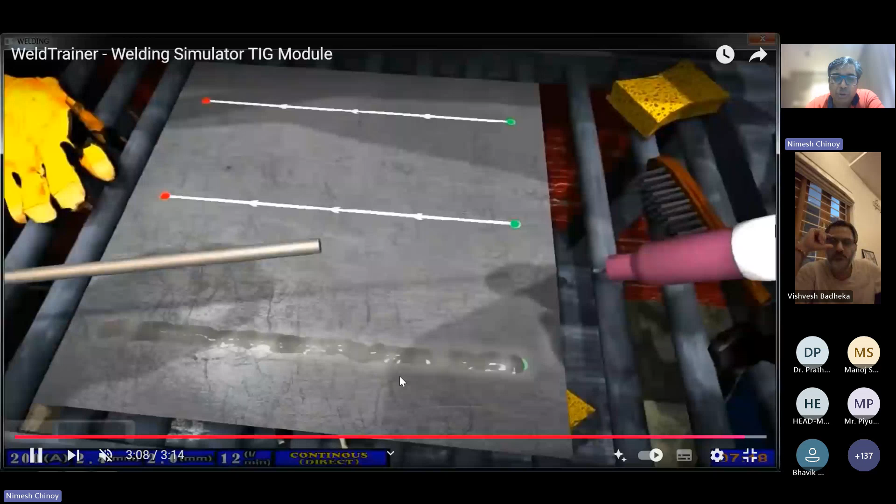Now this is what a welding simulator does. It allows you to do the welding without much difficulty. Let's see if I can show you.

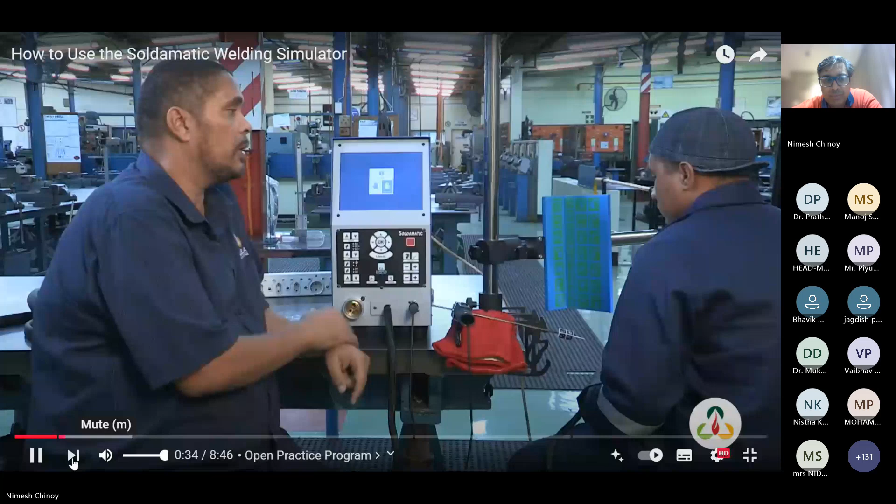So they need to know whether the welder is right-handed or left-handed.

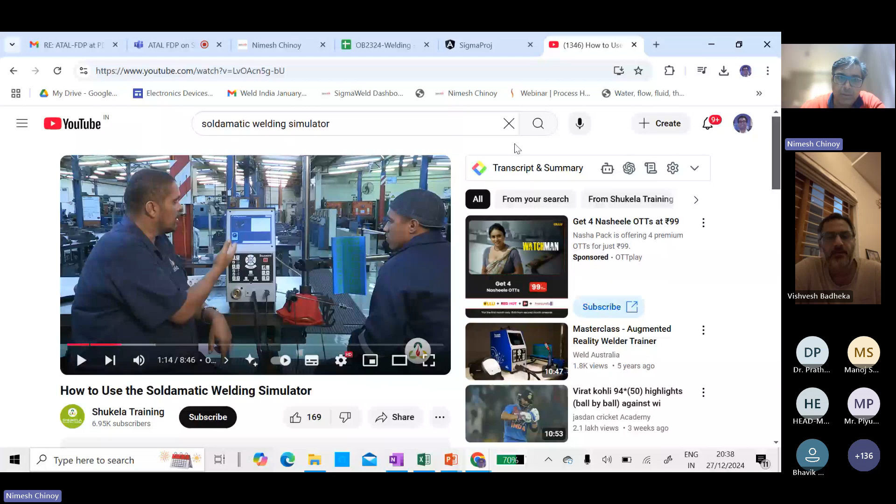So in these welding simulators, do we have indigenous systems available in the market? Yes, we do. There's a company called SimBot, let me see if I can find that. This is the Indian version, SimBot, and it is very close to what Soldamatic is having, and it has multiple processes.

These are the torches you can choose, and this is a mix of AR versus VR. This is owned by a young kid called Varun Khatri, and they have done really a good job at learning and creating this in India. They've been awarded some good awards and recognitions for this.

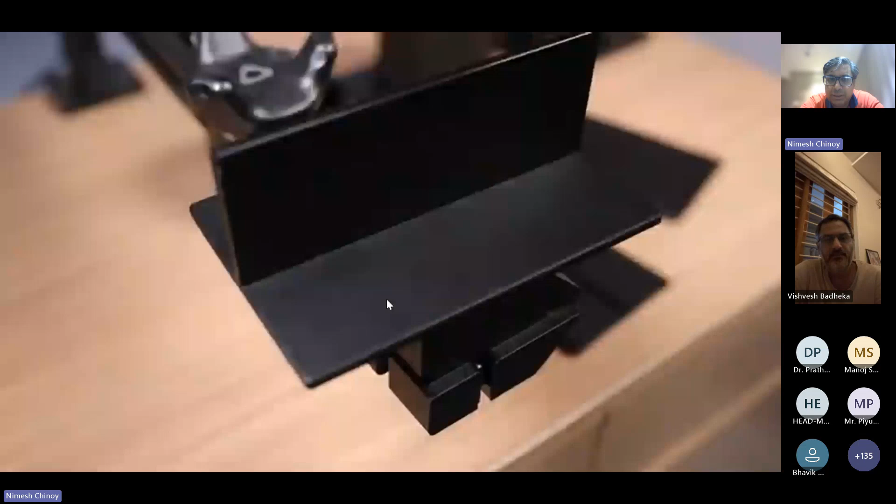Very nice. This is one of them, and it shows you a cross-section view as well. As you are going through, it shows you the cross-sectional view. It can do overhead welding. It will show you when you are welding how you are doing, right or wrong, whether your angle was correct or not.

And this is the torch. He is holding the handle, the electrode, and then he will start welding, and it gives you the analysis of your welding as well. So when you are wearing that VR helmet, it is showing you in virtual reality what is happening. You see the actual plate, not the rough plates. It will show you the view of the plate.

So this was, because we have participants across India, probably many from diverse backgrounds. So this welding simulator, we probably heard the term simulators very frequently. Simulators are there for many other applications, but whether simulators for welding applications, we probably know since many years that these simulators are there in the market. But for training the welder on a simulator and then taking them to an actual system, that probably saves a lot of time, energy, and is a more sustainable way of training the welder.